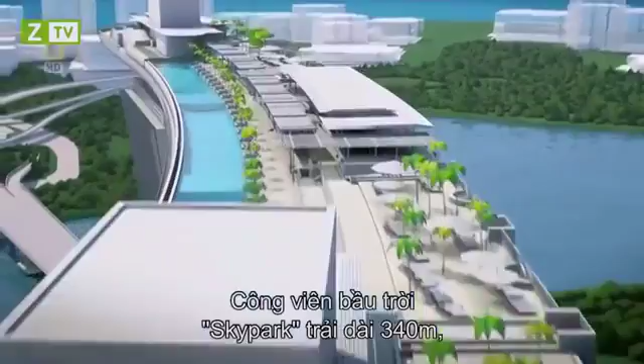Three 55-story hotel towers slope at such great angles, they're in danger of buckling under their own weight. An even bigger problem is the hotel's roof. A 340-meter sky park spans its length, containing gardens, outdoor pools, and the world's largest cantilevered observation deck. But how do you build something as big as an aircraft carrier, 200 meters in the air?

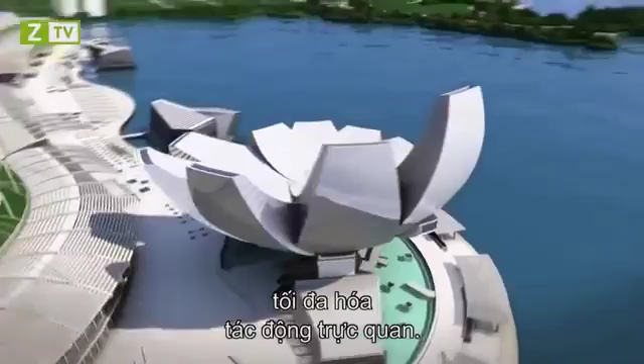In the hotel's atrium, mammoth works of art have to be somehow incorporated into the architecture. Its challenging centerpiece, a 15-ton mass of steel by a renegade artist from Britain. A 60-meter-tall art science museum is designed for maximum visual impact. It will be to Singapore what the Opera House is to Sydney. Only one problem. It seems too impractical to construct. And a set of dramatic glass-encased pavilions, while themselves posing little challenge, have to be built in water.

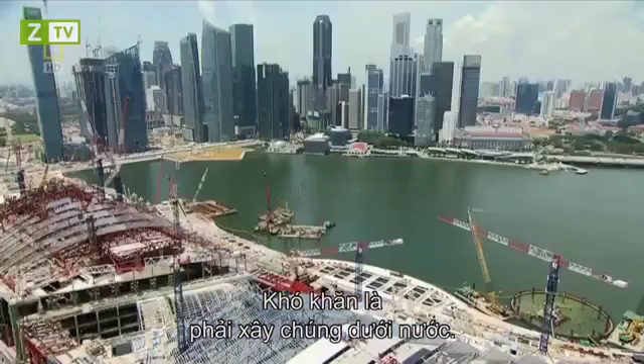The man behind the Marina Bay project understands the risks, but he believes that anything short of astounding will fail. Sheldon Adelson, one of the world's richest men and CEO of Las Vegas Sands Corporation. What we hope to accomplish is to change the face of Singapore tourism. So we expect a very successful development.

That is by far the largest and most expensive single project we've ever undertaken. It'll cost about 5 to 5.5 billion US dollars. It's a lot of money. Now, I know $1 billion doesn't buy what it used to, but by any measurement, it's a lot of money today.

Adelson believes his huge investment is safe in the hands of Moshe Safdie, a world-renowned architect. Safdie is recognized for his use of dramatic curves and geometric patterns. The Marina Bay complex will be his largest and most difficult project yet. I think that architecture has to be timeless. Therefore, what it espouses, what it provides, needs to be something that has a long life.

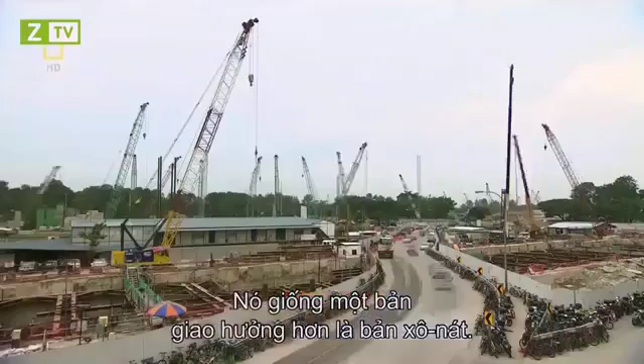What's unique about Marina Bay is all the pieces coming together. You can't think about it as individual buildings. You've got to think about it as a piece of city. It's much more a symphony than it is a sonata. On the ground, engineers are more concerned about the reality of building Safdie's vision. This is the North Retail section area. 30-year veteran John Downs is in charge of overseeing the entire project.

The design is very, very diverse, and each component of the project is totally different from the others. For a project of this size, with the planning, the design, the construction, you'd be expecting somewhere between 6 to 7 years. Here is basically a 3-year turnaround. The first and most critical construction task is to secure the footprint, though this normally straightforward job proves otherwise, since the site was originally allocated for boats.

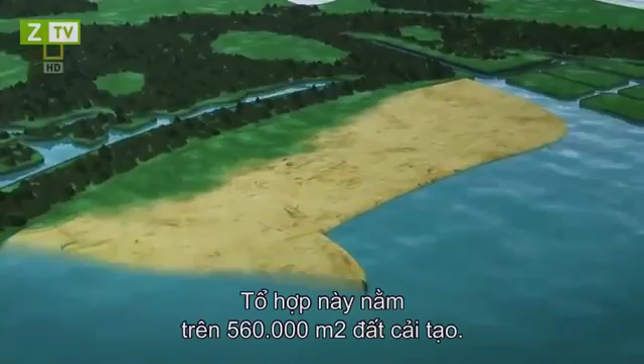The complex sits on 560,000 square meters of reclaimed land, part of a decade-long plan to revamp Marina Bay, a former saltwater estuary that's now a freshwater reservoir. Beneath the reclaimed land, which is essentially a seabed, is a dangerous layer of marine clay. Sometimes called black toothpaste, marine clay has very poor structural properties. If not given complete respect, the unstable marine clay is potentially fatal.

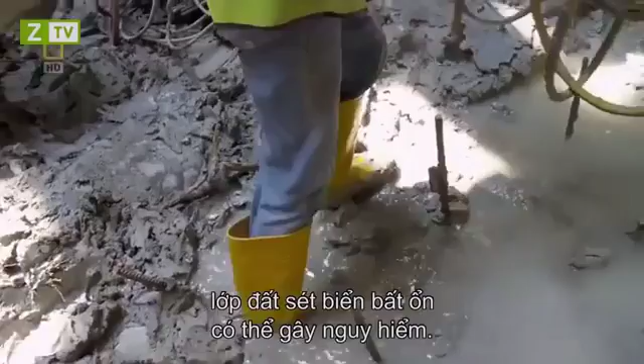In 2004, Singaporeans discovered the lethal consequences firsthand. A routine excavation in an underground tunnel for the mass rapid transit network causes a collapse, creating a gaping hole in the Nicoll Highway, killing 4 workers. The ground conditions in which they were building the Nicoll Highway were not dissimilar to those we are encountering here. They had also soft clay, they had similar depths of excavation between 20 and 37 meters.

One of the big things that was learnt in the Nicoll Highway collapse was the importance of monitoring movements and the control of quality as the construction proceeds. Marine clay is an old foe of engineer Mike Barton. He's defeated it in the past by understanding how it behaves. The big problem with marine clay is that it is so soft that when you dig out the inside, the walls will move and potentially collapse and allow all the surrounding water in the bay into the excavation.

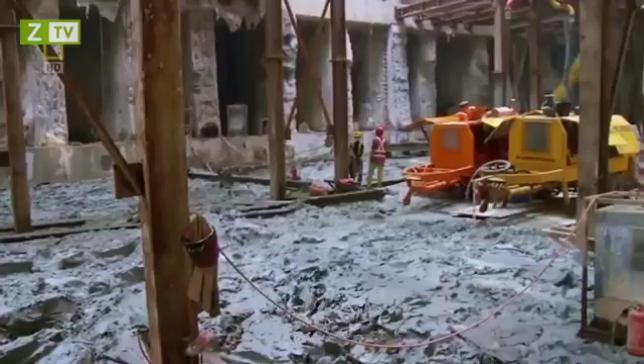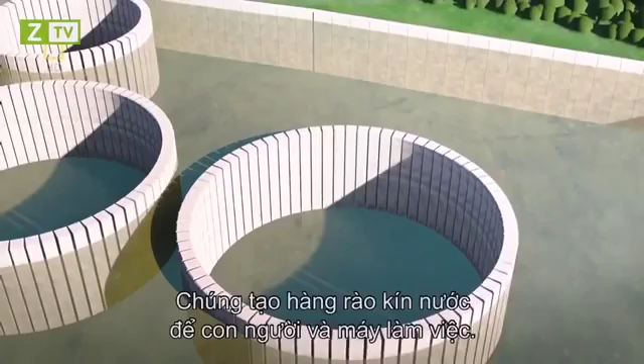So, before work can begin, the unstable building site needs major fortification. To combat marine clay, engineers decide to build giant concrete walls to create stabilizing perimeters for the larger buildings, known as diaphragm walls. Up to 1.5 meters thick, diaphragm walls are steel-reinforced concrete sections, pounded 50 meters into the ground. They form watertight enclosures for men and machines to work round the clock. In just 1 year, over 4,000 meters of diaphragm walls help produce a rock-solid foundation.

The diaphragm walls that we constructed in a formation which we called a peanut formation, which is 2 circles joined together, and a donut formation, which is circular, are able to withstand very, very large forces from the marine clay without any movement. They encapsulate an area that's bigger than a football pitch that enables us to excavate very quickly and to build structure up very quickly.

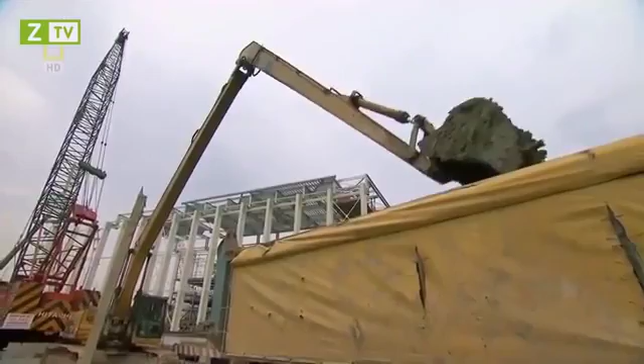Securing the footprint of the Marina Bay project has already taken a year out of John Downes' schedule. He now faces the difficult task of erecting the resort's many buildings in a space of just 2 years. Just managing the whole logistics of that, including the construction methodology, is very, very challenging for us.

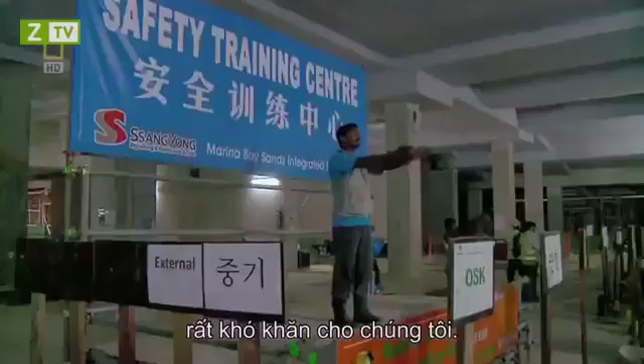To meet his tight deadline, Downes chooses the most direct solution. He hires 16,500 workers to construct every single building, simultaneously. It's like leading a small army. So organizational excellence is key.

We're just on the edge of Singapore in the CBD here, so rather than lose the contractors and the workforce to go off-site, we built our own 3-story project office. We have all of our contractors, our subcontractors here. We house our resident site staff. We have our project management team. We have our construction management team, our design management team, and the logistics here.

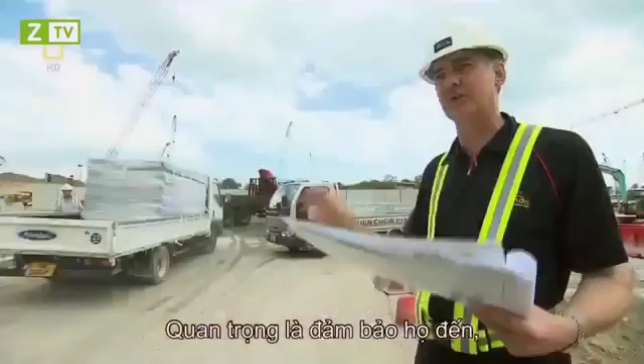The tight schedule also creates problems at the hotel towers, where engineers are already struggling with a congested site. The important thing to do is to make sure that they come in and deliver the goods straight away and then get out again. We don't want too many vehicles on site at the same time.

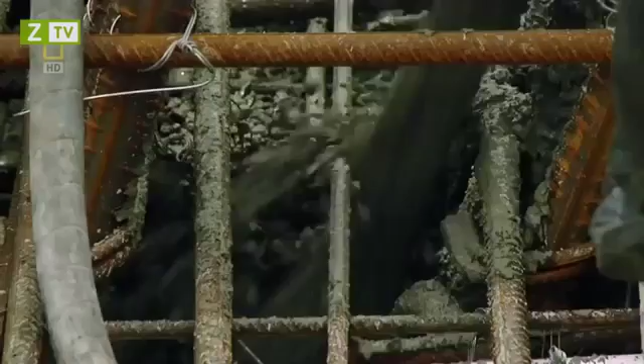To speed up construction and alleviate traffic congestion, engineers turn to a method that's proven itself countless times in the field: in situ concrete casting. Hotel walls are made on site in the thousands. And workers laying the floors are so proficient, they produce one floor per 4-day cycle. It's an impressive display for a conventional solution. But the structure they're attempting is anything but conventional.

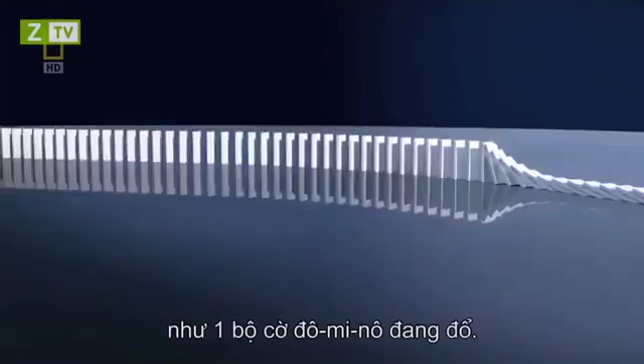The key challenge of building the hotel towers is its unusual design. Unlike other skyscrapers, part of the towers slope at incredible inclines. Like a set of collapsing dominoes, the towers could buckle under their own weight if a practical building solution is not found.

It's a major concern for engineer Craig Glover. I've been in the industry for 25 years, done a wide range of projects in many different countries, but nothing compares to this whatsoever. There was nothing we could take reference from across the street on the next high-rise or across town. This is a new frontier.

Costing a staggering $5.5 billion to build, the Marina Bay Sands could be one of the world's most expensive mistakes if engineers can't solve the tower's problematic structure. Engineer VC Cheong leads the design team, and their solution comes out of left field.

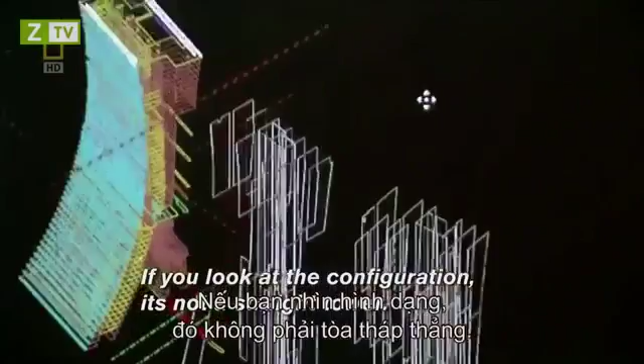If you look at the configuration, it's not a straight tower. It's with a sloping leg. So all this sloping leg is actually inducing a very huge external force onto the structure. We cannot build it without any support. So we actually formulated a solution to prop up the sloping edge.

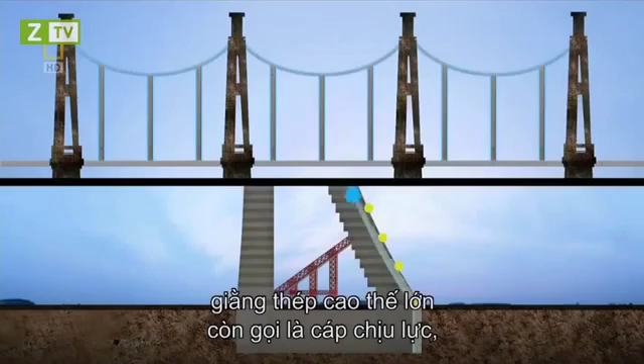Using a technique they've never employed before, engineers build large temporary struts made of strong structural steel. They prop up the sloping towers as they rise. Like a suspension bridge, high-tensile steel tendons, also known as tension cables, give an added layer of support inside the walls. In theory, both the struts and the tension cables are temporary and will be removed once giant link trusses connect the towers at the 23rd floor.

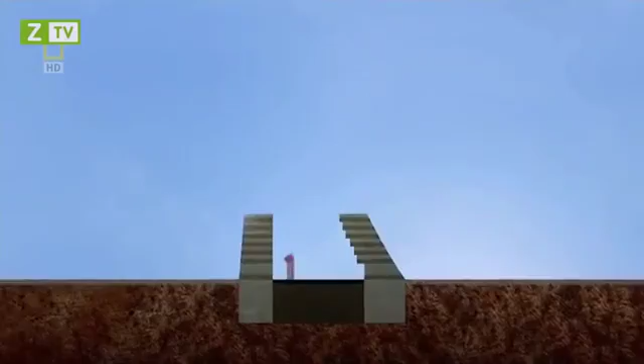The sheer weight in concrete is enough to topple the towers at level 8 if the engineers' calculations are wrong. To reduce the chances of failure, Glover and his team make a radical decision. Instead of removing the temporary tension cables in the tower walls, they make them permanent supports. I feel good it's in there because it's added strength, it's added support.

We have a twined network here of high-strength steel. And what we do is we bundle these up so they form a cord with multiple strands inside this conduit. We place this conduit inside the walls prior to casting the concrete. So what we then do is once the concrete is cast, we anchor one end into the concrete.

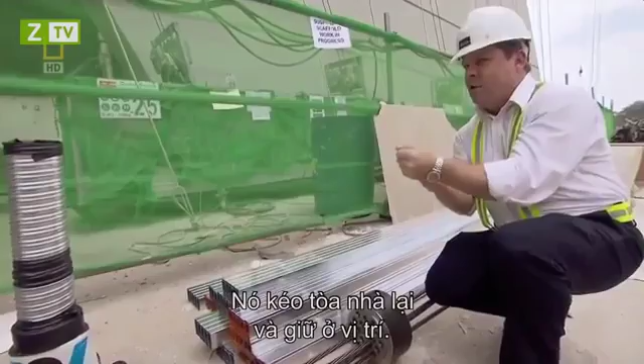So we then put a very high-strength pneumatic jack onto the collar and one by one pull these strands through and tension them up. What that does is basically pull the building back and hold it in place. If these cables were to suddenly break or if they weren't in place, we wouldn't be able to control the self-weight as we build more and more of the building up.

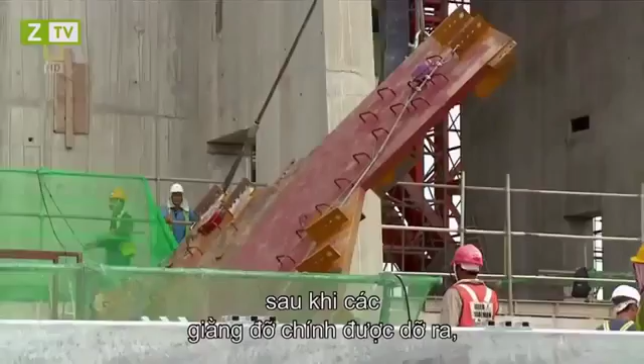Despite the team's quick thinking, the true test of their engineering decisions will only happen once the main support struts are removed and the massive link trusses installed. Link trusses are huge reinforced steel brackets that bind the towers at the 23rd floor.

Once their installation is complete, they transfer the sloping tower's weight completely away from its temporary struts. Once we're satisfied that we don't have any stability issues, then we can bring the large hydraulic cranes in and, member by member, start to dismantle the struts. We've got a lot of time pressure, so we just got to make sure that these things keep moving.

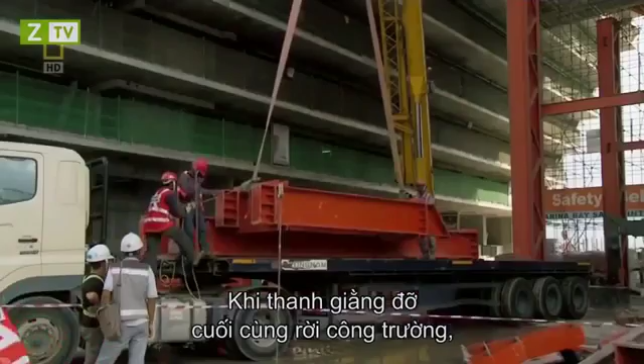As the last pieces of support struts leave the site, Glover and his team can finally breathe a sigh of relief. The link trusses are holding the building load. So far, so good.

Unfortunately for engineers eager to start its construction, architect Moshe Safdie isn't happy with its current shape. Somebody looked at them and said, looks like a bunch of bananas. In fact, Mr. Adelson said, looks like a bunch of bananas. I said, well, if they look like a bunch of bananas, we're not there yet.

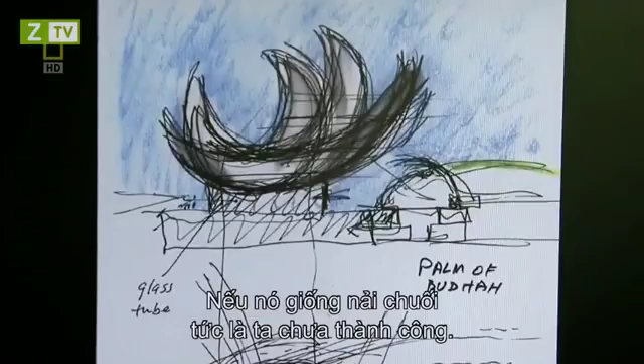It's terrible news for Safdie's design team, especially its principal, Gene Dyer. There are times that Moshe will come in with an idea. We think it's quite exciting. We'll pursue the idea for weeks or even months. He'll come back and say, I want to change the idea. And we've already bought into the idea, so it's a bit frustrating.

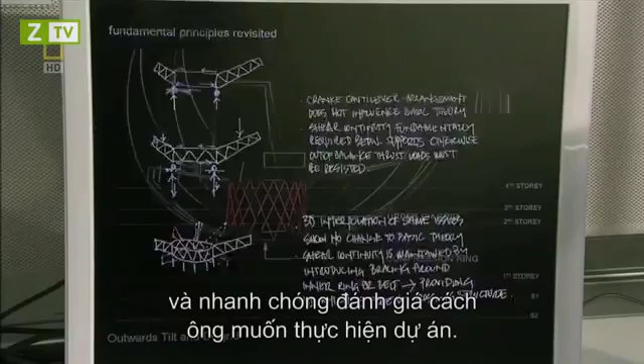To rework the unique geometry and dimensions of the Art Science Museum, Dyer and his team turned to advanced 3D modeling programs. It not only makes navigating the museum's complex geometric patterns easier, it shortens the process to a matter of days. The model is dynamic and it can be moved by just changing one or two elements. Moshe could experiment. He could make rapid judgments in a very short period of time about which way he wanted to take the project. This is a process that was impossible to do 10 years ago. Without the computer, this would take years and years and years.

After months of refining the design, Safdie is finally happy with the result. The mathematical precision that we gave them made them even more beautiful. It led some people to say, well, hand of welcome. Others said, is that a lotus? And the more ambiguous the associations, the closer I thought we were getting to our target. Because I think the least exciting buildings are those which have overt symbolic associations.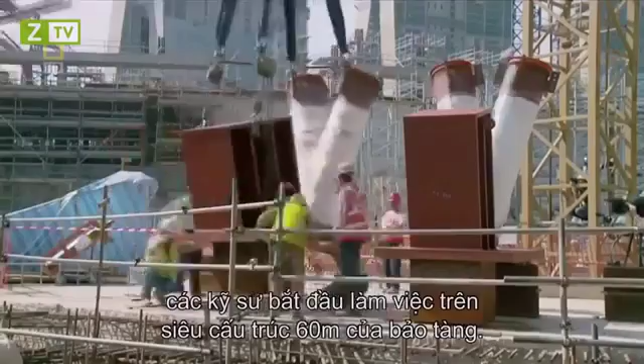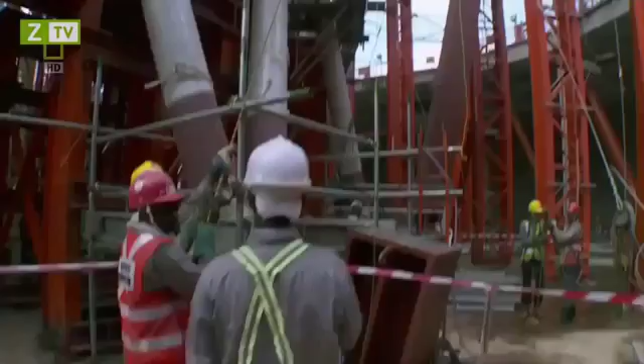Armed with the new design, engineers begin work on the museum's 60-metre-high superstructure. A staggering 5,600 steel elements, weighing some 5,200 tons, are prefabricated to exact specifications. They are then trucked onto site and assembled. It's like putting together a giant jigsaw puzzle. Each element has to be installed with pinpoint accuracy. If it's even a few millimeters off, engineers will have to start from scratch.

Engineers of the massive atrium at the base of the towers are facing an equally tough construction process. Safdie has come up with a challenging design. He wants to inject art into the atrium's architecture, so that visitors will feel like they're walking through a grand Gothic cathedral.

In medieval times, if you think of a Gothic cathedral, there's the architecture, there's the stained glass windows, there's the sculptures on the pinnacles. You cannot draw a line and say art and architecture. Art and architecture are one, they're singular experiences. And I think what we try to do here is come back to this integrative mode.

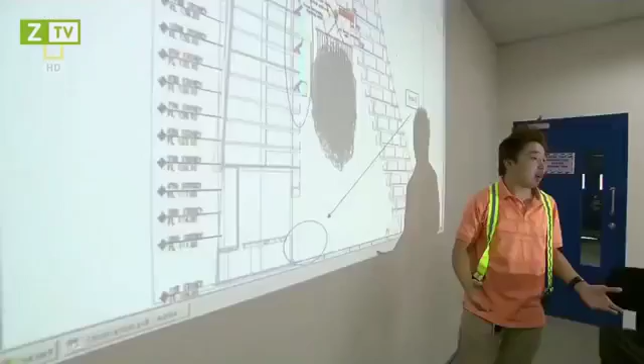To create the centerpiece of his vision for the atrium, Safdie commissions renowned British sculptor Antony Gormley. Famous for his unusual approach to art, Gormley is the brains behind the Angel of the North sculpture in northern England. What he's about to attempt is proving to be more of a construction challenge than an artistic one. A cloud-like sculpture some 40 meters long, made up of 15 tons of high-grade stainless steel, hung 12 stories above the atrium.

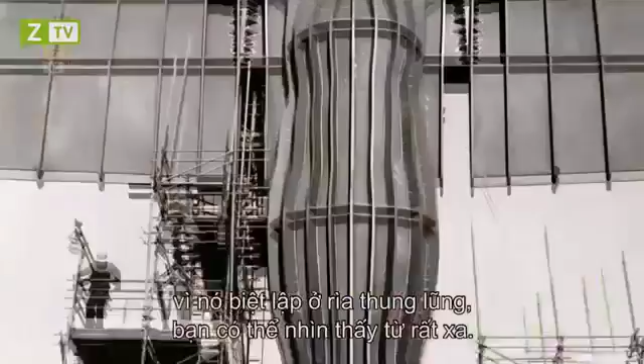The Angel of the North is, in a way, making a very traditional public sculpture because it's isolated in space at the edge of a valley. You can see it for miles and miles. It's very much about occupying space. This is about activating space.

But just as they're about to begin construction, a bombshell drops. September 2008. A global financial crisis wreaks havoc on markets. The flow of the hundreds of millions of dollars that keep the Marina Bay project going every month suddenly stops.

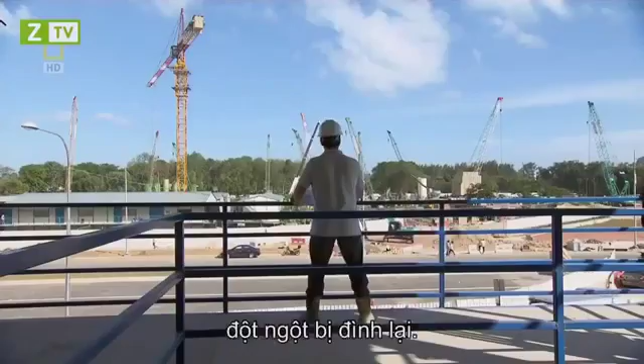For engineer Matthew Pryor, it's a massive blow. I feel devastated. I mean, it couldn't be worse. Probably the worst day of my life professionally. There's no more money coming through. So unless we put some funding in place or there's something, we're going to have to shut the jobs down. It is a tough decision to be made, and we don't know what we're going to do just at this point in time.

With the future of the multi-billion-dollar project plunged into doubt, all eyes turn to the man behind it, Sheldon Adelson. The next move of one of the world's richest men will determine the fate of the mega construction site.

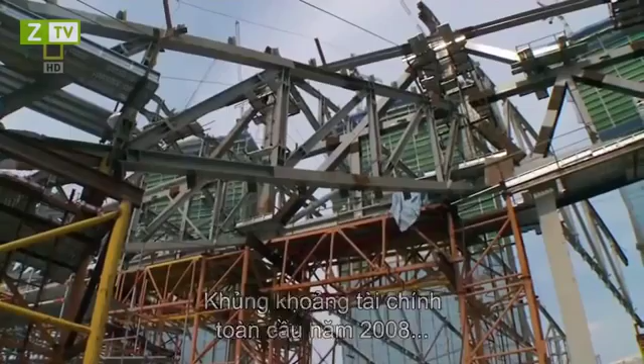The 2008 global financial meltdown is a haunting echo of the 1990s Asian crisis. Back then, progress on Shanghai's World Financial Center came to a complete halt for 5 years. For Adelson, that's simply not an option for the high-profile Marina Bay resort. His vision of changing the face of Singapore tourism is at stake, and so are billions of dollars of investment from his Las Vegas Sands Corporation.

He prefers finding a stopgap solution to weather the storm. Throughout history, there has never been a trend that went straight up, nor a trend that went straight down. So it goes up and down. It's only a matter of time when things will recover. In a bold move, Adelson pledges his vast personal wealth to the completion of the project, effectively ending any speculation of failure.

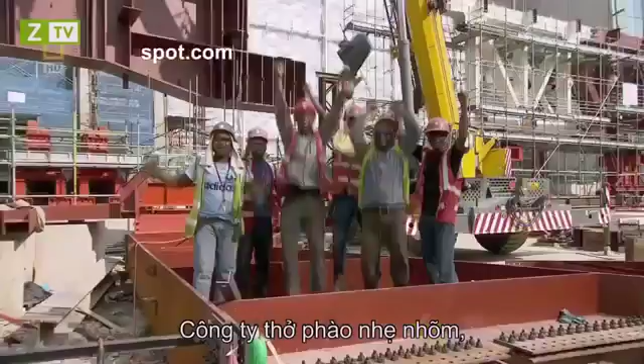There's a massive sense of relief in the company. I mean, everyone pleasantly surprised how quickly we've got through this and the fact we could hold it together and get it going again. So euphoria is probably the best way to describe it. With the crisis averted, construction on the 3 55-story hotel towers, the casino, theatres and convention centre resumes at pace. Everywhere you turn, steel is being installed. It's vital reinforcement for every concrete structure on the 15.5-hectare site.

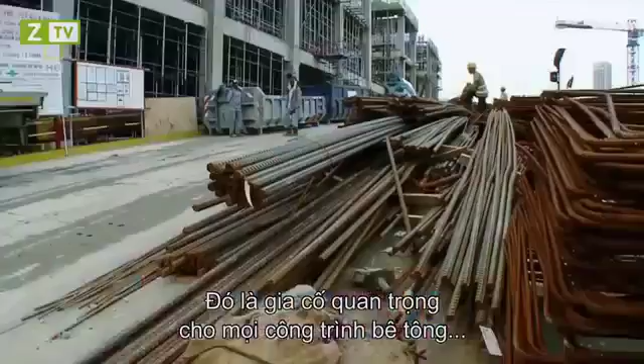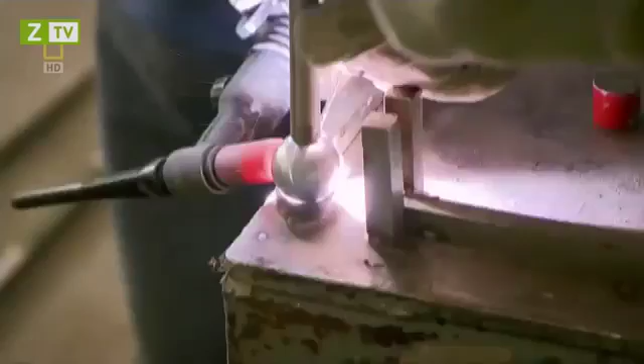For one project at the tower's atrium, steel is more than just reinforcement. To construct the 15-ton Drift sculpture by British artist Antony Gormley, engineers had to first laboriously prefabricate it into over 70 segments. The segments are then welded into 8 slices and will ultimately form the sculpture. It's a tricky operation, but engineers are able to complete it swiftly due to a system of codes and numbers that enable them to quickly identify what goes where.

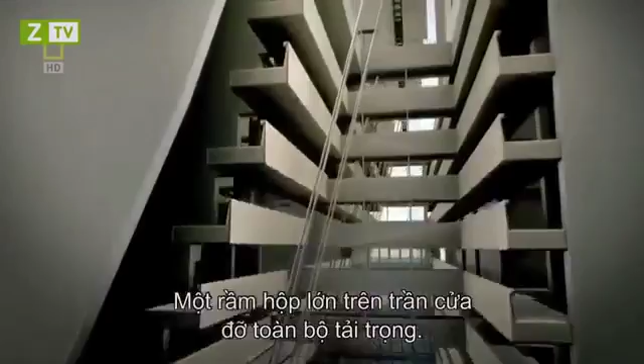Once all 8 slices of Drift are fully assembled, it's lifted up into position by a temporary lifting frame. A massive box truss on the atrium ceiling then takes over the load. In theory, the box truss will support the weight of the lifting frame as it's being lowered down. It will be a heart-stopping moment, especially for engineer Graham Stevenson. The lifting frame is about 9.5 tons, so when it picks up and gets some momentum, there's a potential that it just wants to flick over and rotate through its full 90 degrees, and we won't have it under control.

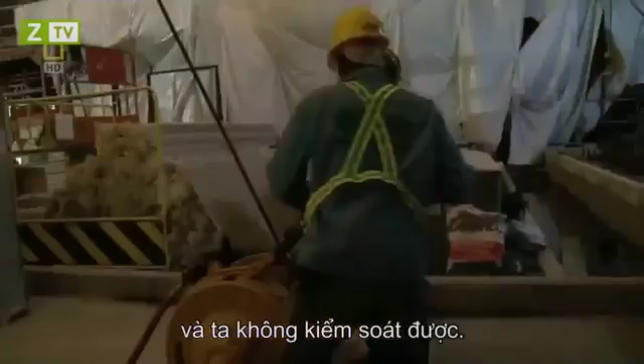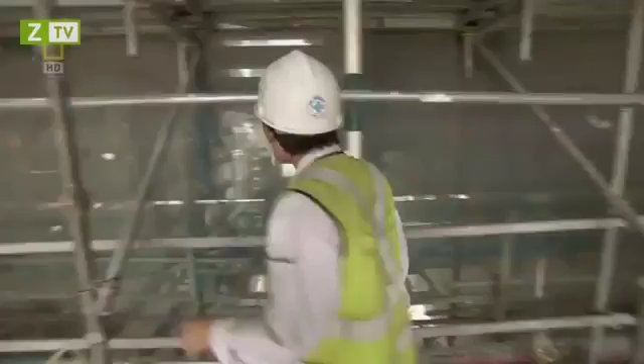Stevenson's solution: 4 powerful automated hoisting drums located at the 4 corners of the frame. They allow workers to control the strength and speed of the operation with high tensile steel cables. A spotter at the top determines the pace of the procedure and marshals the team. The entire operation is estimated to take up to 10 hours to complete. As soon as the frame is in motion, there's no turning back.

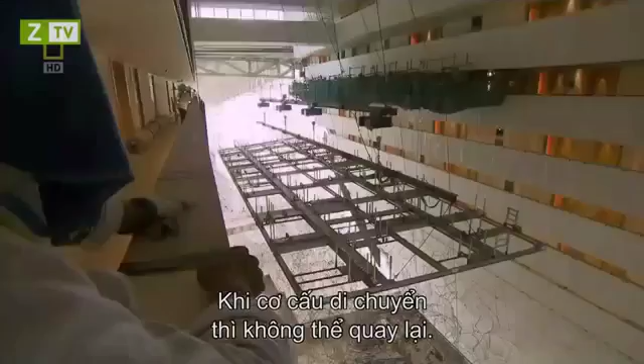Midway through the lift, Stevenson receives reports of a potential problem. 22-story, number 7 temporary cable, scaffolding touching the cable. The temporary cable touching the transverse. Yeah, but is it just the end of a tube? Yeah. So you can just cut the tube? Yeah. Problem solved.

But what was previously an estimated 10-hour procedure now turns out to be a 24-hour marathon lift. At 6 a.m. the following morning, they complete the job. Absolutely fantastic. The Gormley is now finally in its final position, so really an end of a long and exhausting day, and big thanks to everybody, but it's finally done.

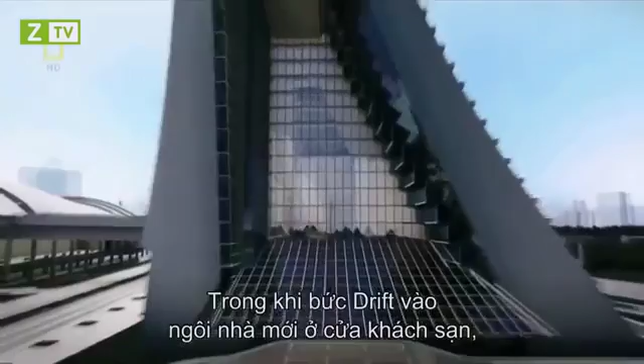While Drift settles into its new home at the hotel atrium, elsewhere attention is focused on one of the project's key features, the crystal pavilions. The two glass-encased buildings by the promenade are set to be the resort's premier shopping and entertainment complexes. But before engineers can make them a reality, they have to secure their footprint. And already a major obstacle threatens to sink their objective. The crystal pavilions are situated within the confines of Marina Bay. So to found them, engineers have to find a way to build in 6 meters of water.

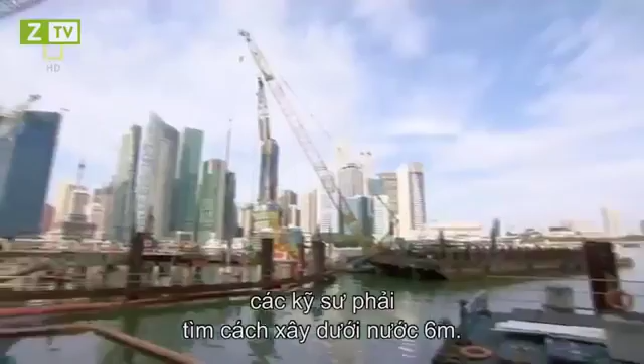The responsibility of tackling the problem falls on the shoulders of engineer Kurt Vella. I'm from Sydney. The underlying foundation in Sydney is sandstone, it's rock. All you need to do is just dust off the surface and you can build skyscrapers on it. Here it's very different. All the structures have to be heavily founded.

To keep water out of the construction site, only one solution seems viable for Vella and his team: a waterproof steel structure called a cofferdam. This temporary formation surrounds the worksite with a circle of steel sheet piles, creating an impenetrable shield that locks out the water, keeping the workers safe within. For the job, they rope in a 12-ton vibro hammer. It punches the sheet piles deep into the earth, making the cofferdam rock solid and resistant to movement.

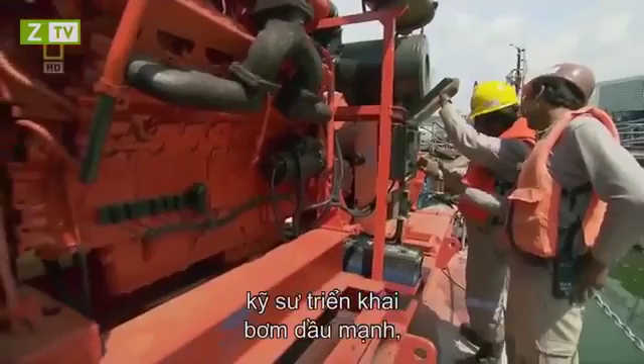With the cofferdam secured, engineers deploy powerful diesel pumps and run them 24 hours a day, ejecting any water that remains within the walls. This last step comes with inherent dangers. The force of the water outside creates what engineers call hydrostatic pressure. In theory, it's powerful enough to force water through any gaps in the cofferdam.

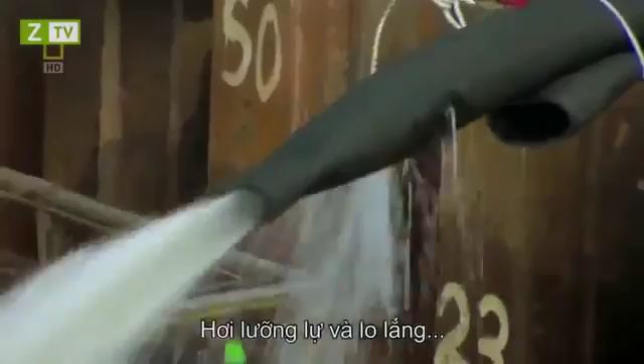It's something that Vella prays will not happen. There's a bit of hesitancy and concern because we've got to build this building in the middle of Marina Bay. Everybody can see what we're doing, so if it leaks, it's a problem. If it fails, if it moves, if it collapses, it'll be an absolute catastrophe. After a day of pumping, Vella's worst fear comes true. Parts of the cofferdam are leaking.

To rectify the problem, Vella orders a team of 8 divers into the water on 10-hour shifts. Their mission? Find out where the water is being forced in and plug them shut with epoxy resin. Anson Lee is an 8-year diving veteran.

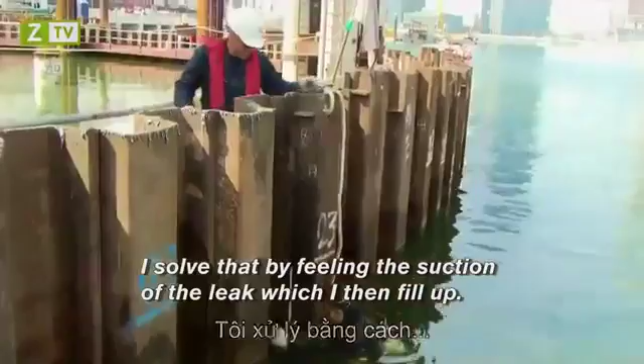The toughest part of our job is the environment. The visibility is poor here. It's totally zero. I cannot see anything here below. I solve that by feeling the suction of the leak which I then fill up. You have to overcome all the fear that you can't see under the water. But okay, I feel proud to be one of this team to build this thing out. After 2 weeks of hard work by divers and the pump crew, the job is finally complete.

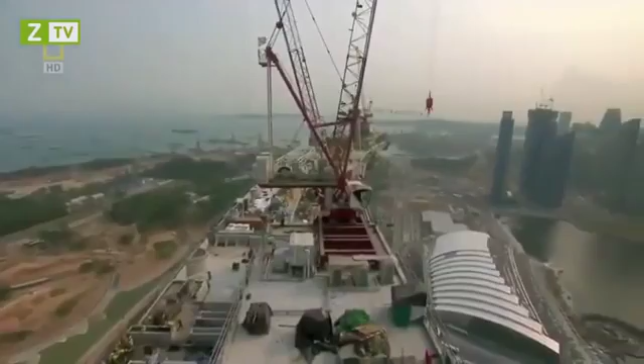After 2 years of battling the elements and overcoming difficult construction milestones, the 3 sloping towers of Marina Bay Sands can finally celebrate their topping off ceremony and move on to the next phase. But a destructive force of nature threatens to throw a spanner in the works. With climate change predicted to affect the pattern of Southeast Asia's typhoons, Singapore may one day experience the destructive tropical storms plaguing its northern neighbors in the Philippines and Taiwan.

When that happens, typhoon-force winds could spell disaster for the hotel towers, especially the 340-meter sky park sitting on top of it. The force of the wind can make both buildings sway dangerously, causing irreparable damage to the structures. The Sky Park, offering 360-degree views of Singapore. The visionary design will have enough surface area to park 4.5 Airbus A380s.

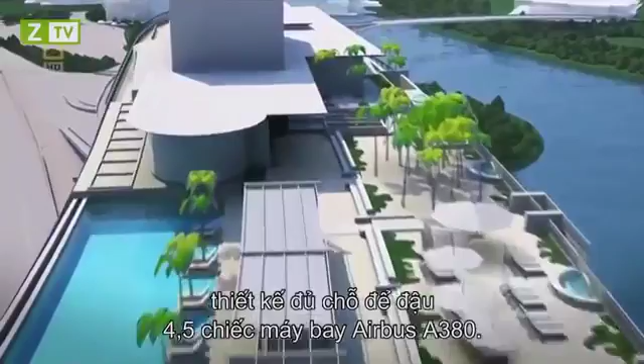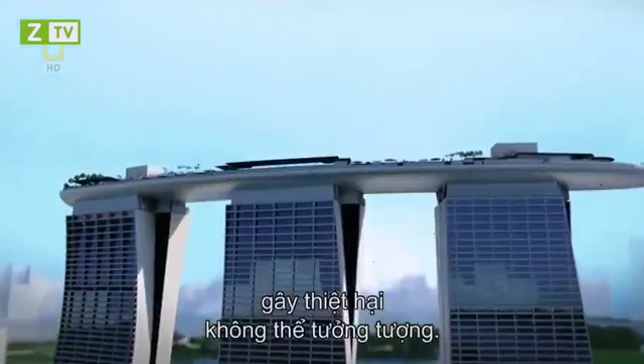Safdie's revolutionary idea scores points for ingenuity, but it clearly isn't what nature intended. Typhoon-force winds threaten to rock the towers and its sky park, causing unimaginable damage. If engineers are to make the building a reality, they'll need a rock-solid solution. Still got to do all this planning. Engineer Tony McKee has little time to make things happen. At the moment, we're running a couple of weeks behind what we'd originally planned. We're not entirely happy about it, but at the end of the day, we've got to do this safe and we've got to do it properly. You're safe close to the...

To fight the enemy, McKee knows he has to first understand the enemy. He hires leading US wind engineers CPP to carry out extensive testing on the towers and Sky Park. Their mission? Find out how Singapore's potential wind forces affect the buildings. Wind engineer Roy Denoon oversees the process at their state-of-the-art wind tunnel in Fort Collins, Colorado.

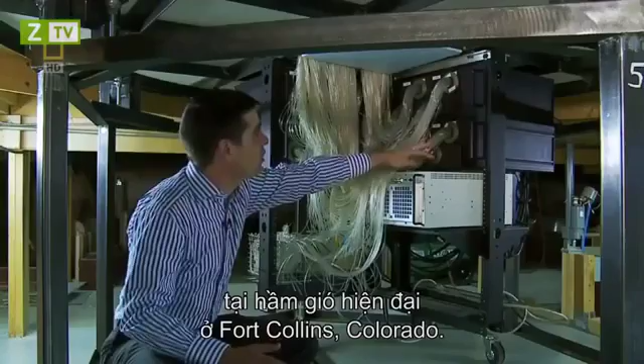The thing that makes this really special is the fact that we have this sky park running across the top, linking all the towers together. So whereas normally with a normal tower, we'd measure the loads on the tower in isolation, with this one, what we're needing to do is to measure the loads on all 3 of the towers at exactly the same time. So that way we can know how the towers are going to move relative to each other, so we can make sure that they're not going to put excessive strains or movements into the sky park.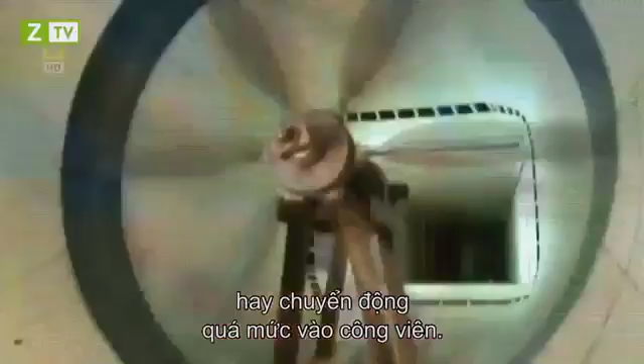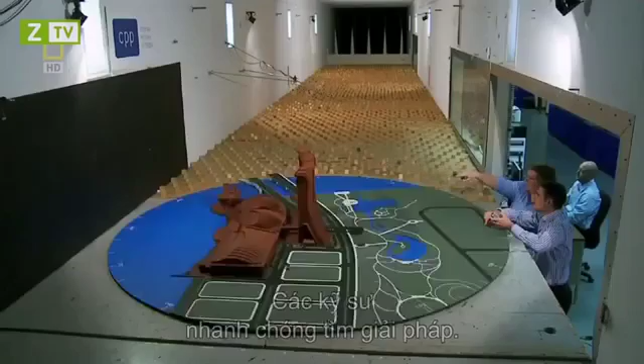During the tests, a scale model of the Marina Bay Sands towers is blasted with 40-kilometer-per-hour winds to simulate faster typhoon winds in reality. Over 1,000 pressure-measuring instruments inside the model register how the winds affect the buildings. At the end of the tests, engineers confirm that the 3 towers can deform by some 200 millimeters during the fiercest storm. Engineers quickly figure out a solution: movement joints.

Inspired by bridge engineering philosophy, movement joints are essentially gaps located between the concrete towers. The huge gaps allow for movements of up to 250 millimeters. Aluminium and stainless steel plates act as sliding components. They can move back and forward over each other, a little bit like you'd see in a flexible bus, where you have that articulation happening in the middle. It's a similar concept to that. To accommodate the differing movements of the 3 towers, engineers install multi-directional steel bearings below the sky park.

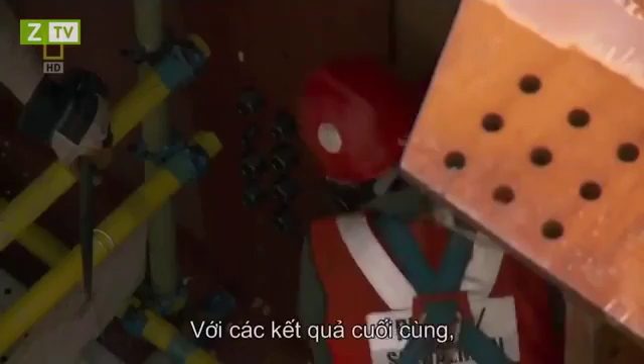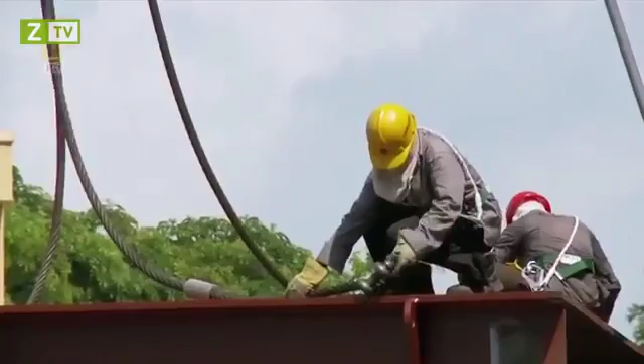Armed with the final results, McKee can now safely begin construction of the sky park. Consisting of some 10,000 tons of steel, the sky park is as big as an aircraft carrier. The most practical way for engineers to construct it is to break it into 14 segments on the ground before assembling it at the top of the towers. There's no room for miscalculation at 200 meters in the air.

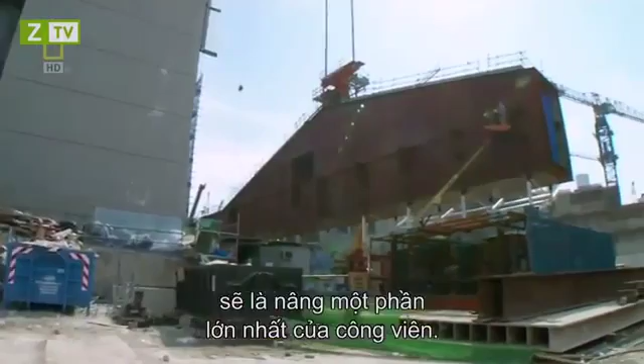Each segment is carefully prefabricated and tested by steel specialists Yongnam, and then trucked to the site independently. From the very beginning, McKee and his team anticipate that their biggest challenge will be lifting the 2 largest segments of the sky park, the box girders. Measuring 80 meters long, their combined weight is a staggering 1,400 tons.

How do we feel? A little bit of apprehension. You know, it's a significant lift that hasn't been done before. If something goes wrong, it could be really significant for us. To reduce risks, McKee turns once again to proven bridge building technology.

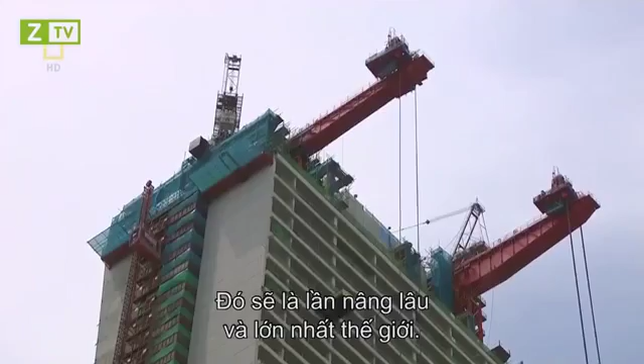In a process known as strand jacking, giant temporary lifting gantries made of strong structural steel will use powerful hydraulic jacks to lift the box girders up to the top of the towers before sliding them into place. It will be the longest and largest lift of its kind in the world, and McKee needs the best in the business. He puts a pioneer in the field in charge: Swiss-French company VSL. Engineer Edy King and his team have successfully raised bridges, stadium roofs, and even Ferris wheels.

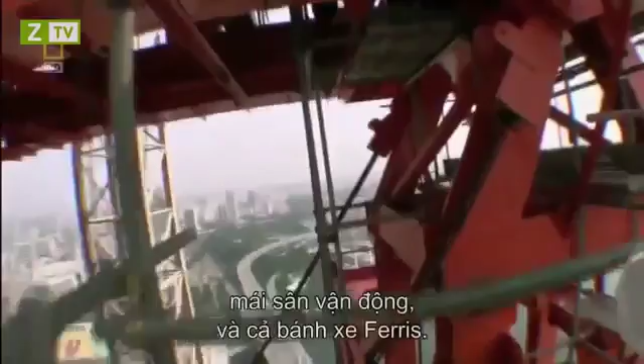The toughest part of my work is you have to plan everything very precisely, because everything is set up in millimeters. So we have to lift up and slide it in and position it with 5 or 10 millimeter accuracy. If we don't do it properly or safely, the biggest hazard is the thing can fall down to the ground.

Other factors further complicate the lifting process. Due to an increasingly tight schedule, the team is forced to conduct the lift during Singapore's annual monsoon season. It's almost impossible to predict when a tropical storm will hit. When it does, the accompanying lightning strikes can endanger lives. And because the whole operation takes place meters from a jam-packed highway, curious onlookers will be able to see any mistakes the engineers make. It's a potential public relations nightmare.

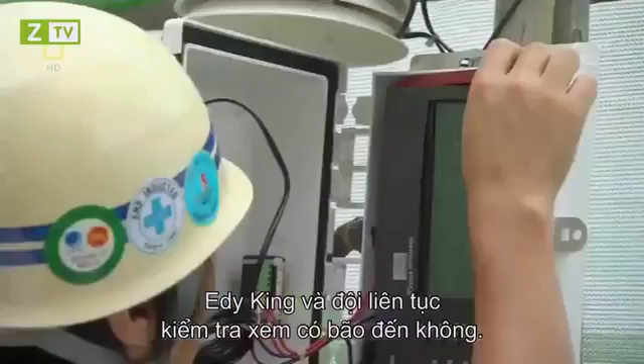Okay, now I stop now. During an estimated 16-hour lift, the box girders will move at a cautious 14 meters per hour. Edy King and his team constantly check their weather gauges for any incoming storms. The hydraulic jacks are also inspected regularly for overheating. No one wants the operation to stall in mid-air.

Point 1 to point 4. 288. Oh, that one, this one. Change to channel 2, yeah?

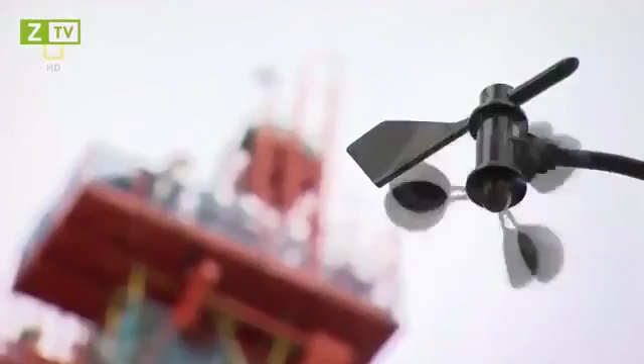Despite the team's best efforts, Mother Nature catches them by surprise. Okay guys, rain is coming. It's better we stop here. An approaching downpour threatens to grow into a lightning storm. We are 200 meters up and the surrounding buildings are quite far away, so there's a chance of lightning striking a high point like this. So we have to stop and wait until the weather gets better before we continue our lift.

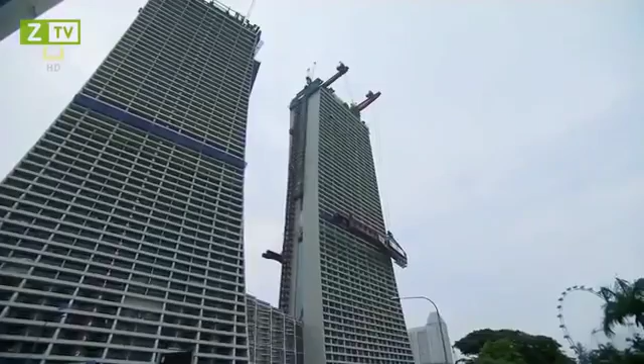McKee's worst fear comes true. If the girders remain stuck midway for too long, he will have to order them down. Okay. After a tense 3 hours, the lightning threat passes, and the operation cranks back to life. By the time the box girders slide into position, it's past midnight. Everything went quite smooth today, so we hope tomorrow we can do the same.

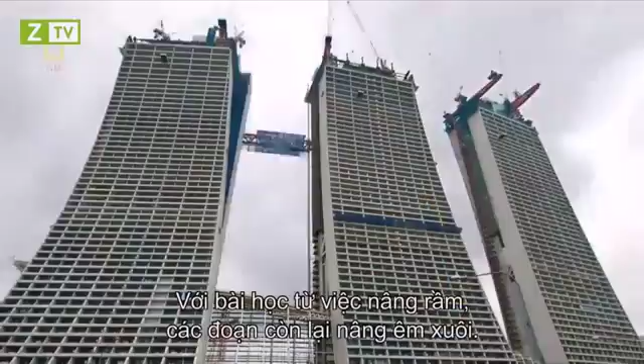With the lessons learned from the box girder lift, the rest of the segments go up smoothly. As the final piece rises into place, Singapore is already marveling at the team effort behind one of the world's most ambitious building projects. In just 3 years, engineers overcame seemingly impossible construction challenges, defeated marine clay, engineered ingenious design solutions, and survived the most debilitating financial crisis since the 1930s. As the finishing touches are put on the resort, the stage is set for an opening party, Singapore style.

Those involved reflect on the project that has already far surpassed their expectations. It's a bit overwhelming, you know. I'm in the process of disconnecting the umbilical cord. It's not easy for an architect. This type of project probably only comes around every 25 years or so. So it's been a lot of hard work, extremely challenging.

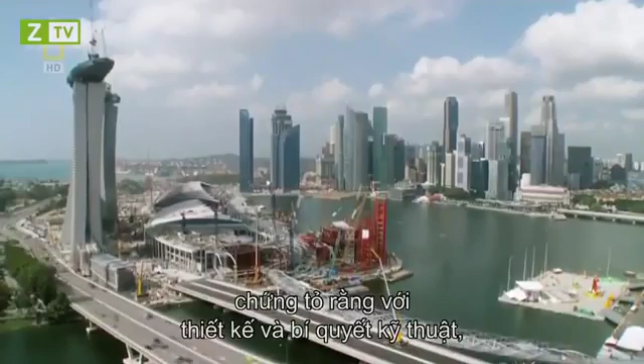I really can't imagine, I couldn't list the number of challenges we've overcome along the way to get to today. Everybody is saying this is kind of a miracle, you know, never seen anything like it. And it's rewarding, it's nice. The Marina Bay Sands, Singapore. Proof that with visionary design and engineering know-how, megastructures can still defy the odds and fulfill the wildest dreams.